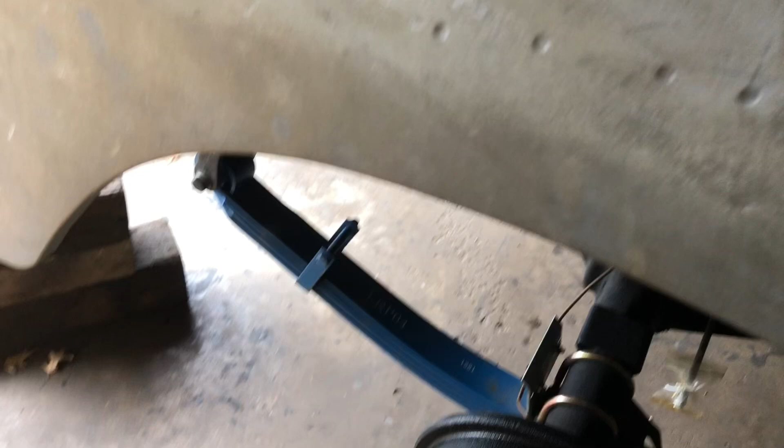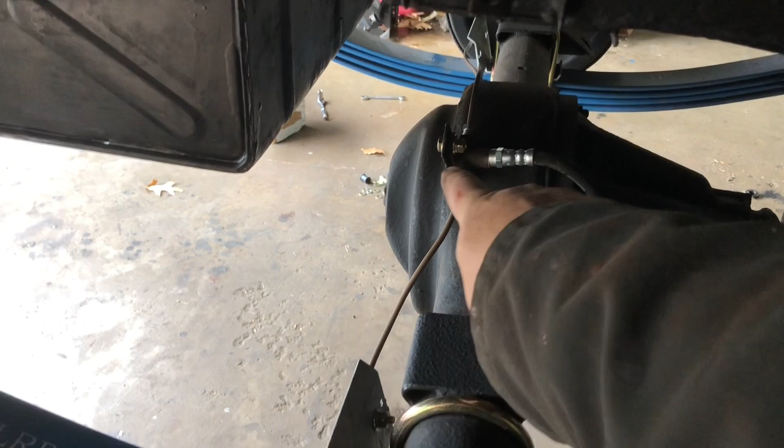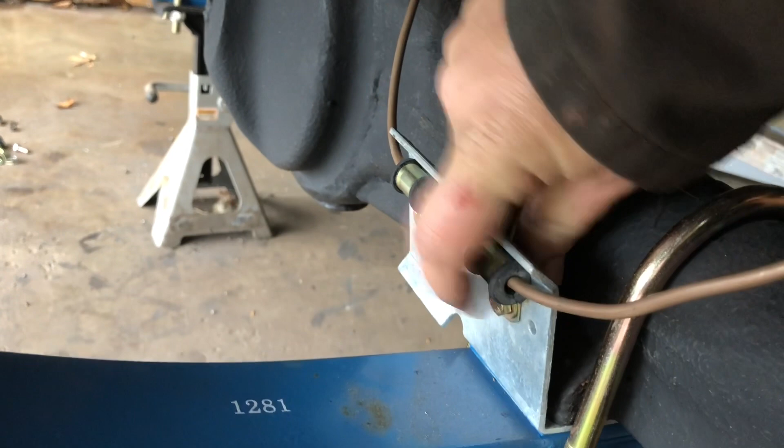Hello and welcome back. So what I'm doing today is I put on the rear brake line with a fresh new bolt in there, and I already made these brake lines before because I had the brakes working before I took it all apart. So today I'm putting these brackets on with new bolts here onto this mount.

So let me show you on the other side. Here's the finished product, so I'll show you on the other side how to put it together.

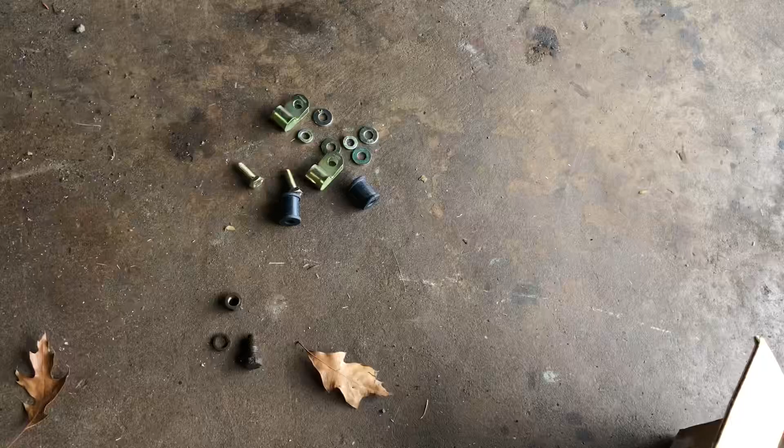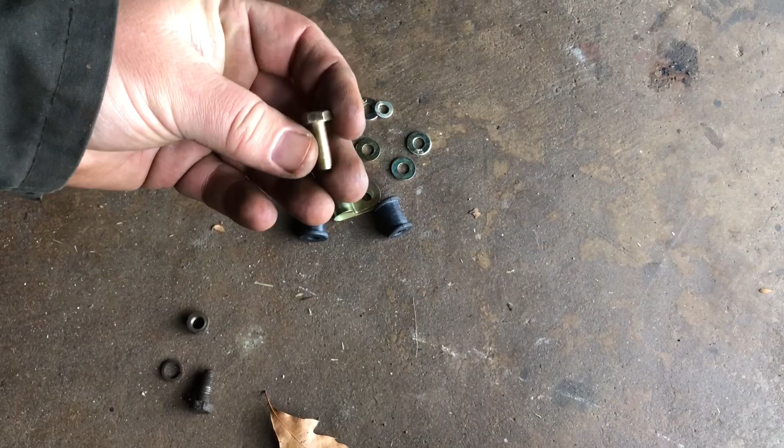Alright, so here are the pieces and parts. Got a little bracket, little bushing, and bolts, nuts. I used 1/4-28 bolts, fine thread, I think they're 3/4 inch long to put them on.

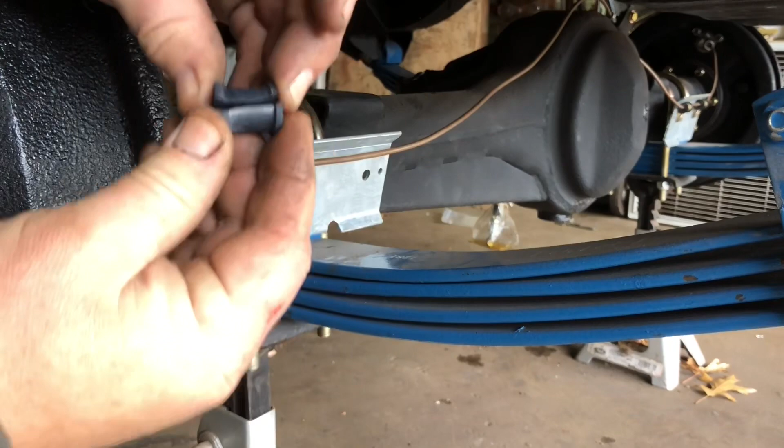So these bushings here, let me show you. These are actually split down here, so you could take it, put them on, put one on the other side.

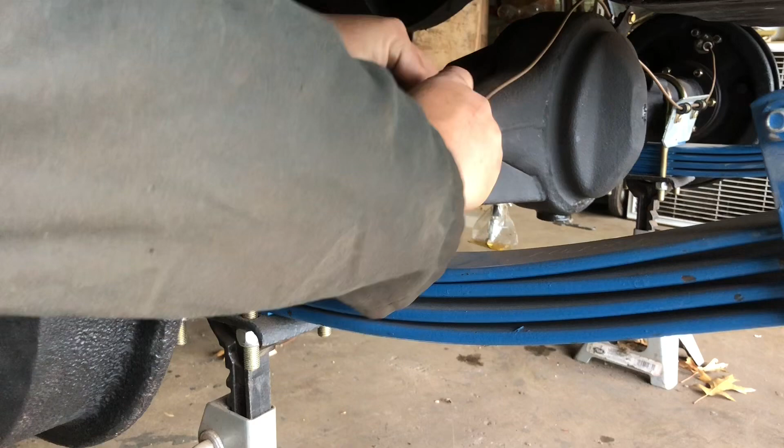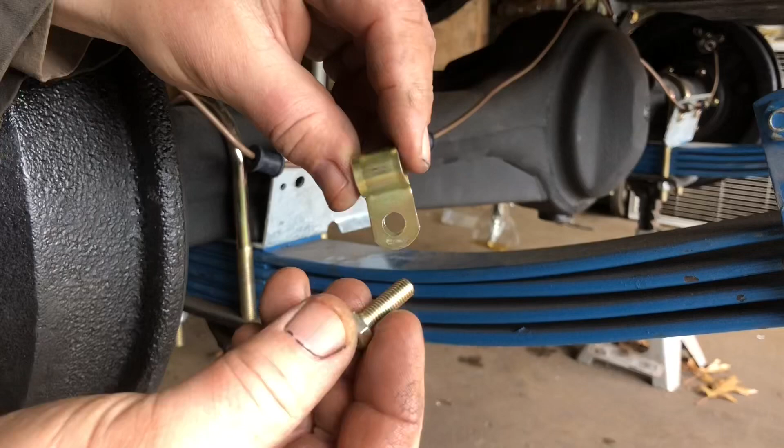There you go. Then these things being BritPart, and you know BritParts are. So this hole was actually, I don't know, maybe a number 8 bolt or screw that goes through, so it wasn't big enough for the 1/4 inch bolt to go through. So I just used my step drill and drilled them right through so then I could put my 1/4 inch bolt there. So you just take these, spread them open.

Put over top of the bushing, like that. This one goes over on the other side. And what it does, it just sandwiches it together like that. Put a bolt, washer through this side, put it together.

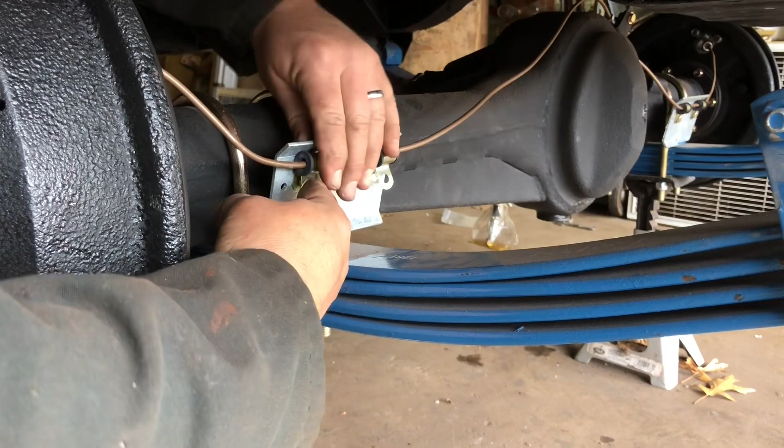There you go. Kind of lines up a little bit. Then you just use one of the holes in this bracket to line it all up. Okay, so you get the gist of that.

So that's what I'm going to do there. And whenever I bought this truck, this plate, which I got from YRM out of all my other replacement panels, the truck didn't even have these plates here, so the brake line actually just went along here and went over. So I think, or maybe it was on the inside, it wasn't even towards the back of it.

So this plate here is the check strap that goes down underneath. It's a safety thing so it doesn't hit your check strap for your axle, so it doesn't go down too far, doesn't get hung up on it or break the brake lines. Alrighty, I'm gonna bolt this up.

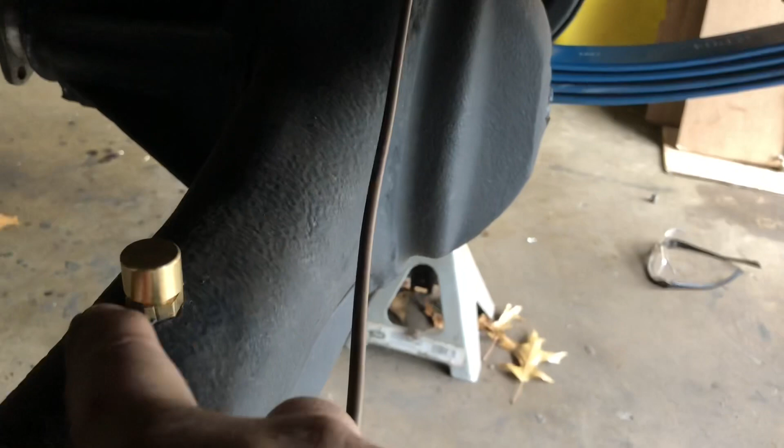I'll be back. Alright, here we are. They're now mounted up, the brake lines. And as I was here, I noticed I forgot to install the axle breather, so I put the axle breather on.

So the next thing I'm gonna do is hook up the brake line, the rubber brake line, from there to there. Alrighty.

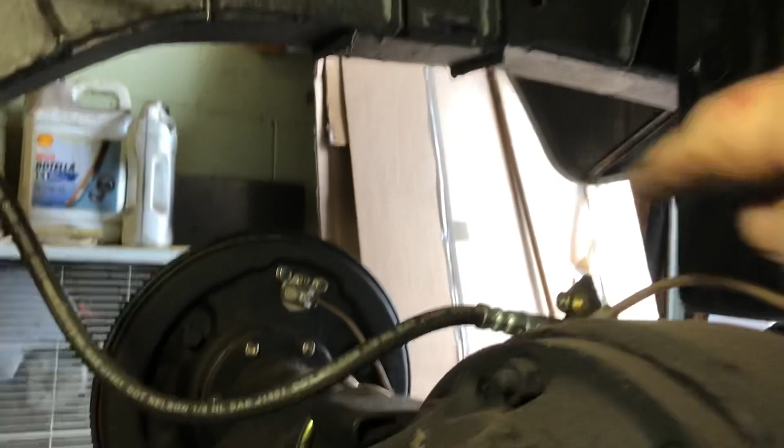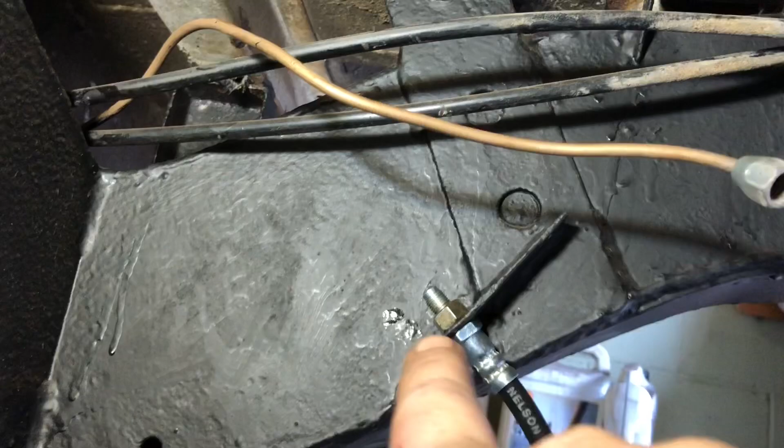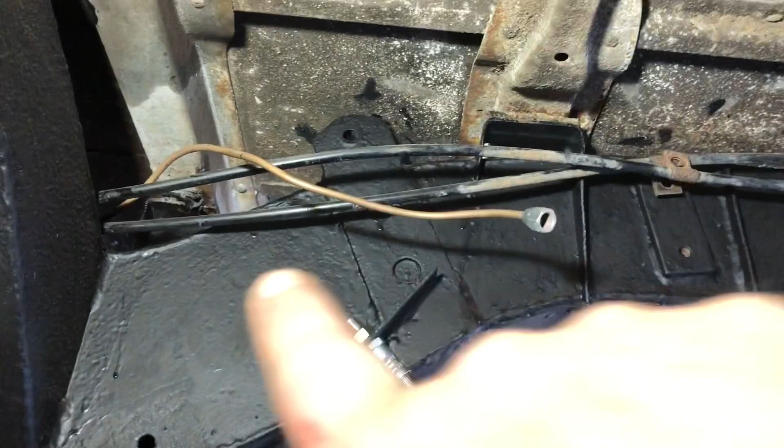Alright, so here we are down underneath the truck. So here's the brake, the rubber brake line, it comes over, it goes up to this bracket, and then this pipe, I think I made it too long, so I'm going to cut it off and make it flow a little bit nicer. I made it way too long while I was out in my driveway working on it. So now I'm in the garage, I can kind of clean that up and make it a little nicer.

So one question I get a lot, or I don't get a lot, but with parabolic springs, people always ask the question, do I need to replace my stock rubber lines? So far, it has a lot of slack to it, and the truck's sitting on stands, so it's holding its weight right now, and it has some slack in there, some pretty good slack to move around.

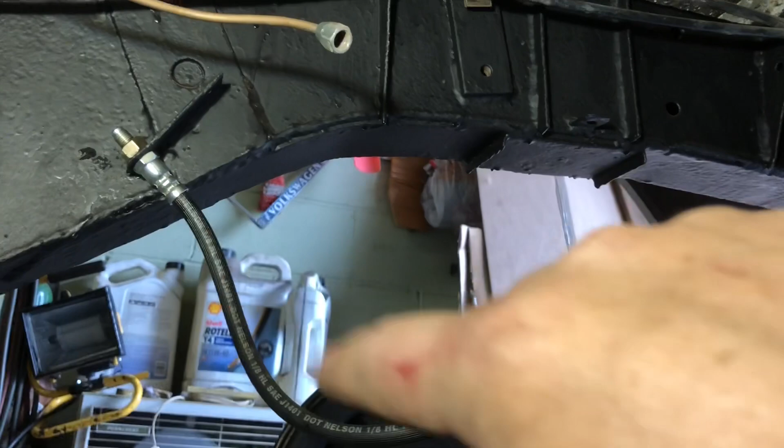So my next test to see if this is going to be a problem with the springs is I'm going to actually jack up the back of the truck, and I have some other work I have to do too while I jack up the back. So that'll be the next test. The first test already, it looks good, I don't see any problems with it as it is. So let's see what happens.

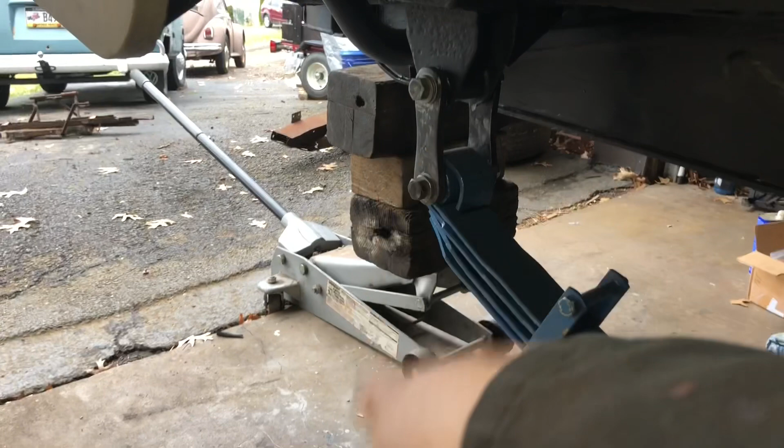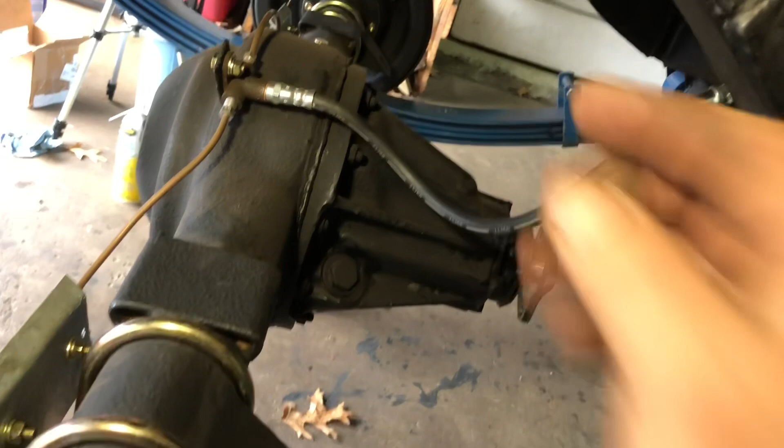Alrighty, so I got the back of the truck jacked up, and the hangers are just hanging straight down. It's just hanging on its own now, the axle by the springs. And you can see here, still lots of slack in there. So I don't know why people say that or whatever, but it looks like it should work just fine, but I'll keep an eye on it while I'm actually driving.

All right, so that's good, brake line's good. So back here, the bolts, they're the ones I bought from Paddock Spares, and not saying anything about them or whatever.

But the bolts have a longer shank, and then the threads on the end. So what I did is I put washers up here. Some lock washers weren't really that great, so I actually bought some 9/16 washers to put on this side for spacers. I'm going to pull the bolt out, take that washer off, and replace it over there. I'll show you in a minute.

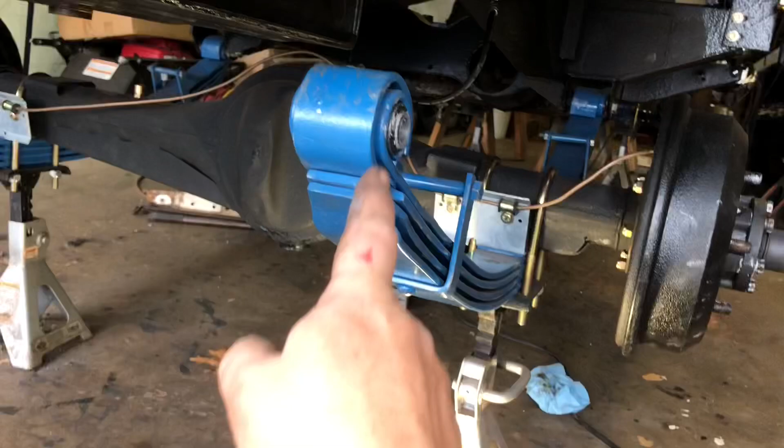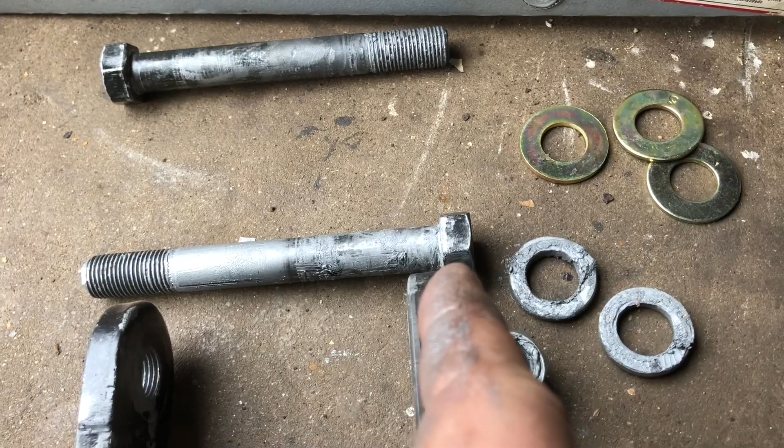All right, so I got the rear shackle off here. You can see I have these spaced the same width as the bushing in there, and the bushing up in the body and frame as well, so they're about the same position. If you take the bolt head and put it flat up against this one, you can see it starts bottoming out because this is threaded on this side.

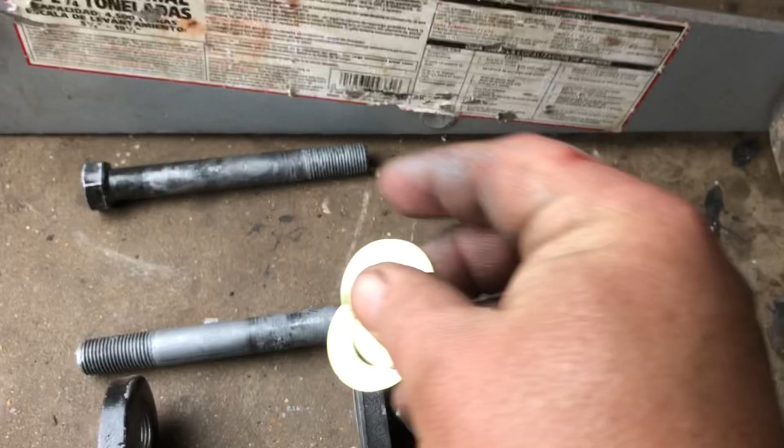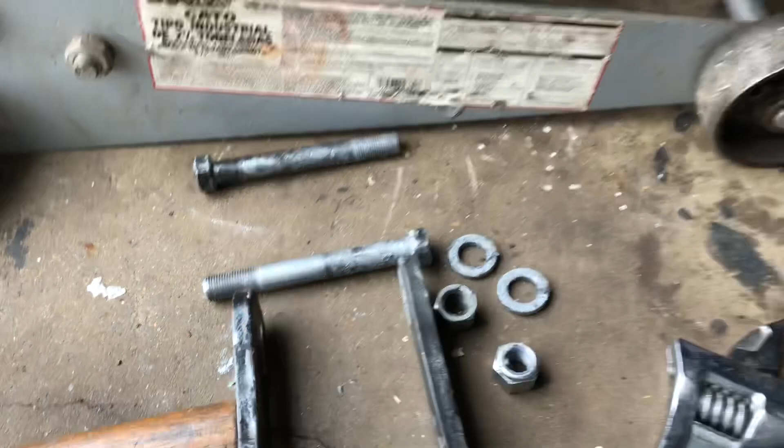So it starts bottoming out and I can't quite get it totally tight. I had these washers in there, and they were spring washers and lock washers - they're not all that great. So I'm thinking if I put 3 or 4 of these spacers in there, it should give me enough spacing so I can get threads to tighten this down the whole way, to pinch the bushing here and pinch the bushing here.

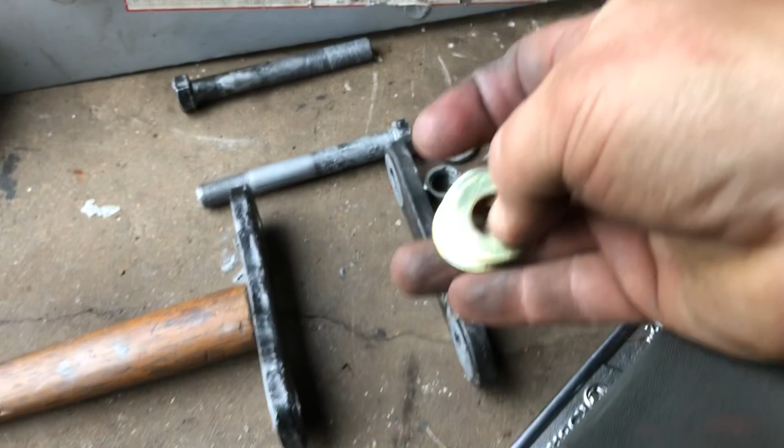Okay, so I'm going to try out some washers. I don't know if I'll do 3 or 4, but we shall see. All right, bye-bye. All right, so I did a test fit with 4 washers. Looks like 4 washers get you nice and tight in there and snug, so it should be good with 4.

Okay, so I got the shackles back in, the top and the bottom one. I put 4 washers, like I said, on there, then went on to the other side. I got the other side done, so I'm happy with that.

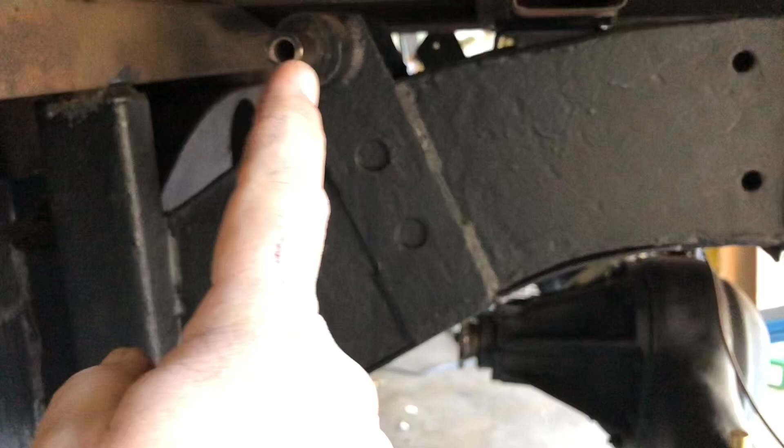So the next thing is I'm going to move on to shocks. I bought some Bearmach shocks here. Those go in right there to up there. All right, I'm going to put those in next.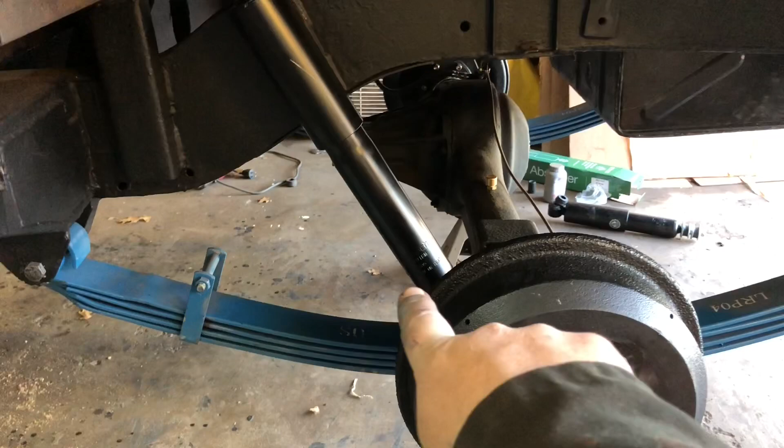All right, so I put the Bearmach shock on, and it's resting right now on jack stands at normal height, and the shock is actually maxed out. It's at its max length, so there's actually no movement in the shock right now in the axle, because I jacked up the back end and watched the shock and it didn't even move. I took the other side off to see, and it's maxed out.

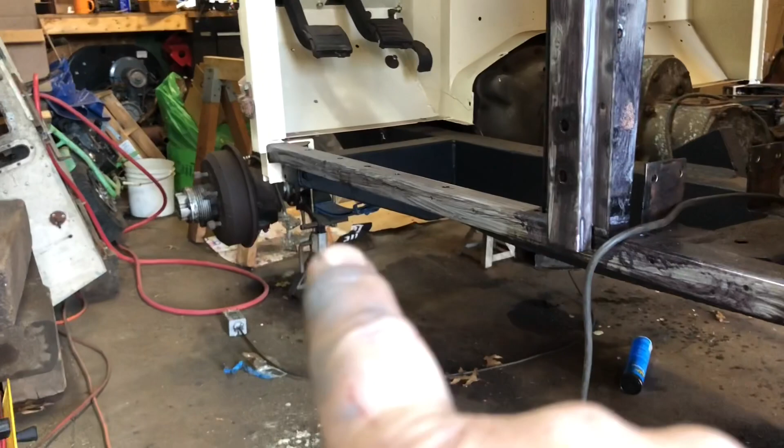It's completely maxed. So these shocks, part number 1401 BM or whatever, are way too short to be used with parabolic springs, at least with the 4 leaves, because it's up pretty high. I think it raised the back end probably about 1.5 to 2 inches, the whole truck itself, along with the front too. So I got Bearmach ones for the front too. When I do the front, I have to test and see what fits up there too.

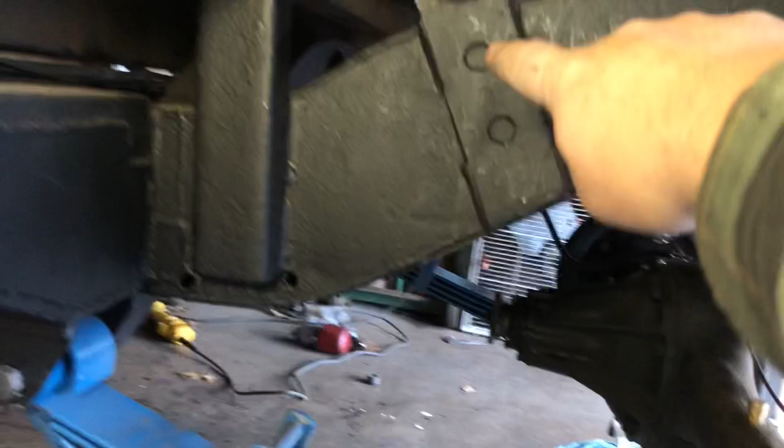So I'm going to take some measurements here and see if I could find a different shock for the rear. I got the shock off on both sides, and I measured from the center of this to the flat right here, from there to the center, and then I figure I'm going to buy new ones for back here. I might as well make sure I have the right ones for the front as well, so I measured those too.

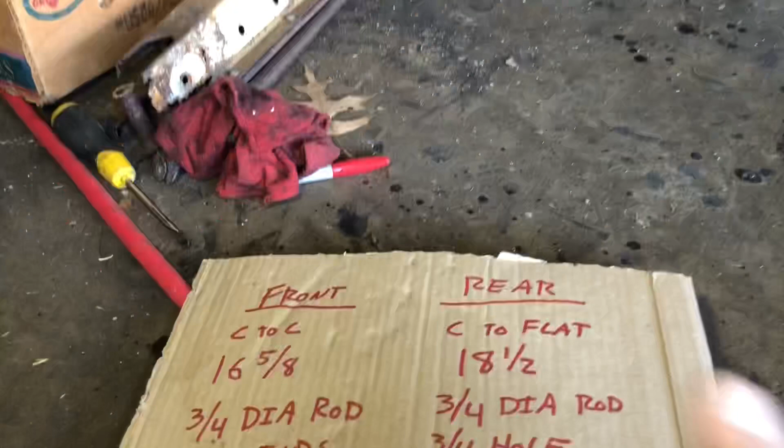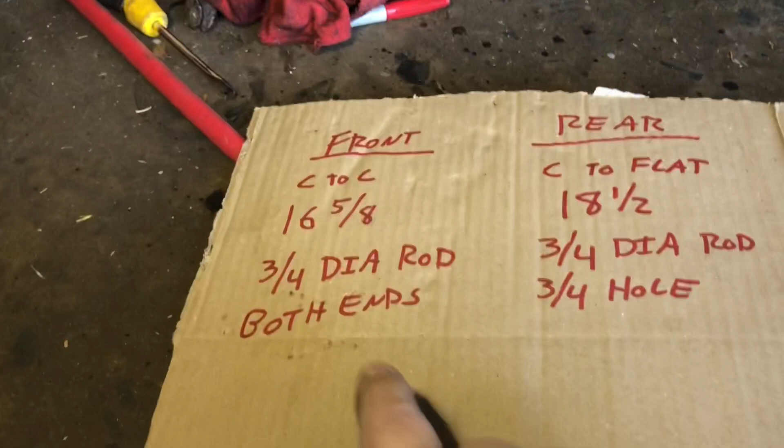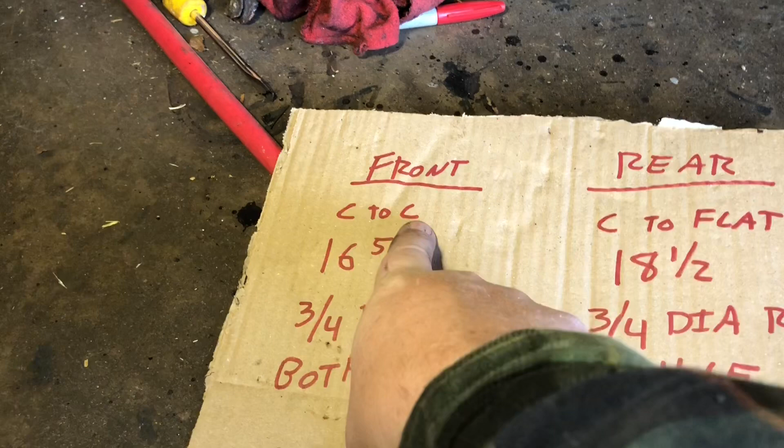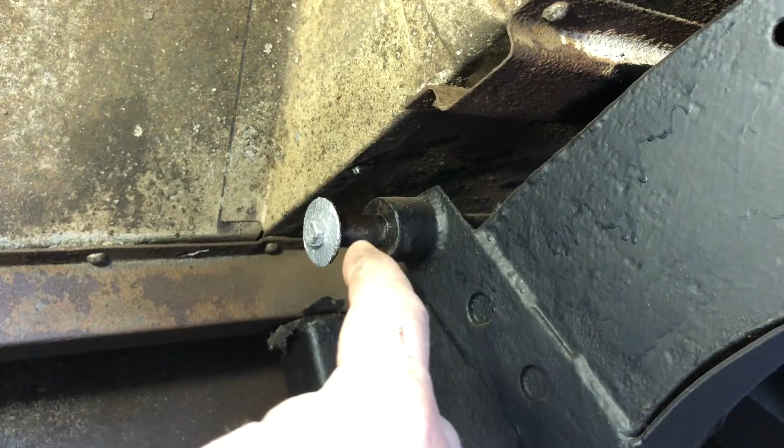So front shocks, center to center, as it's resting statically just on there - everything's just sitting on the springs right now with the jack stands. The front is 16 5/8 from center to center of the eyelets. There's actually eyelets on the top and the bottom of the front shocks, and they fit on a 3/4 inch diameter rod on both ends. So where the bushing sits right here is 3/4 inch, same for the top and the bottom on the front ones.

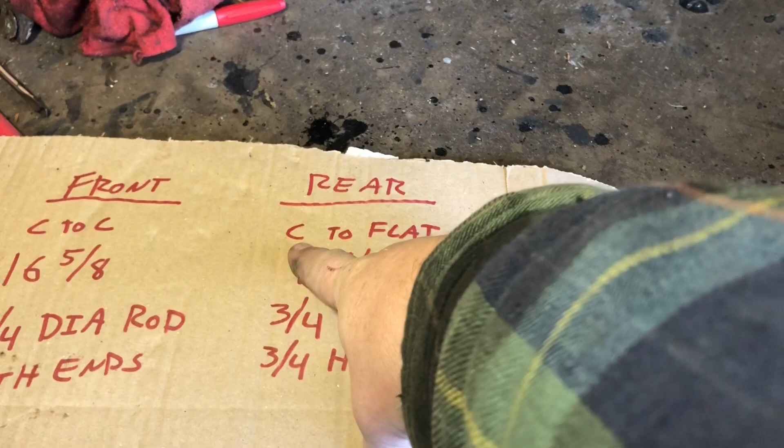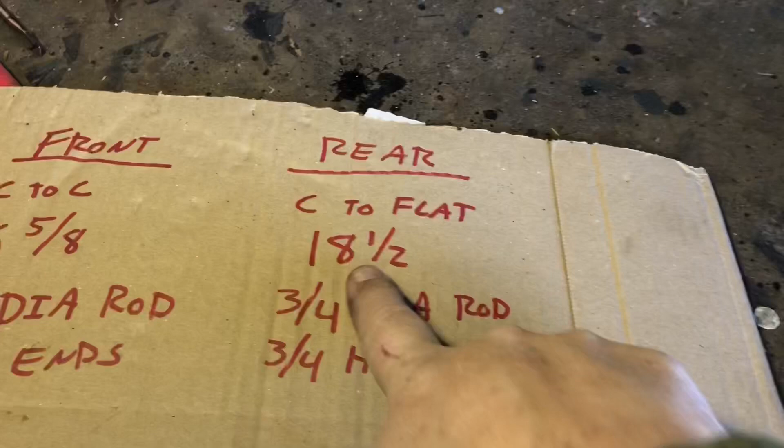So that's there. The rear, I went from the center of that rod to the flat part, right here, from there up to the center of that, and we're at 18.5 inches. Again, it's sitting on a 3/4 inch rod with a 3/4 hole. So I've been searching on the internet so far, and I found some Monroe shocks that would work on the front.

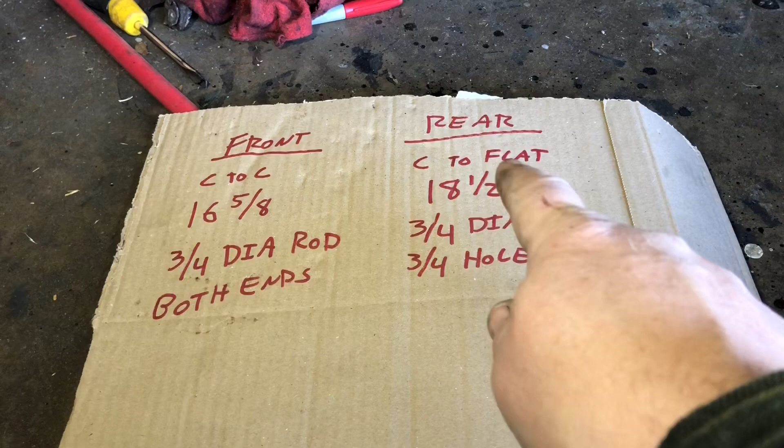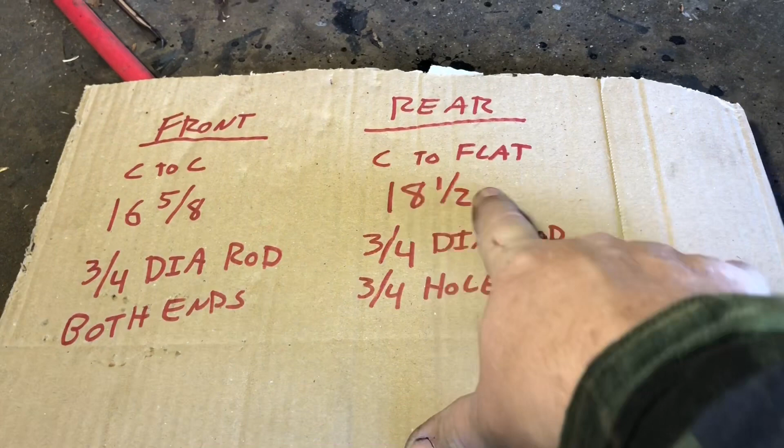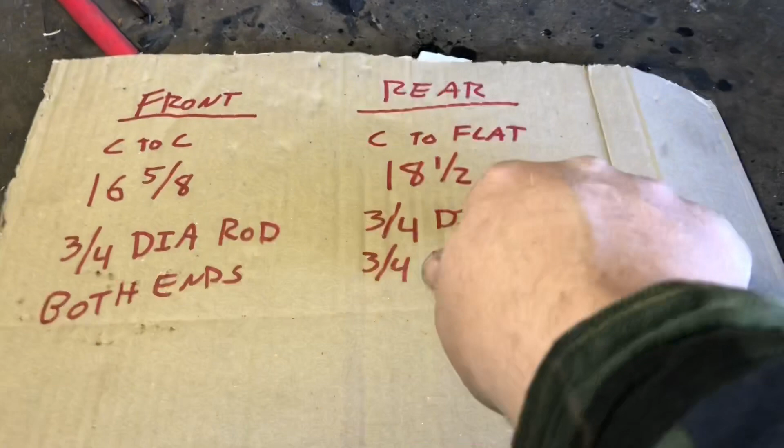But I can't find a shock that fits on the back because they all seem to have center to center, round bushings on both ends. But to have the round bushing on the top, and then a rod stud for mounting into a hole, is the hard part to find so far. So I emailed a company and asked them if they have these type of shocks for this or that. I sent them both, so we'll see if we get a reply back.

Okay, so the shock dilemma is going to take a little bit longer, so I'm going to put the bump stops on now, and I might do the back ones and the front ones all together and get all 4 of them done in one shot.

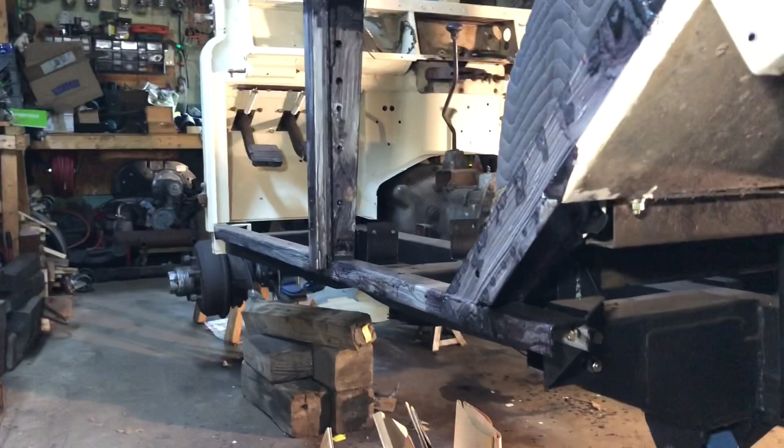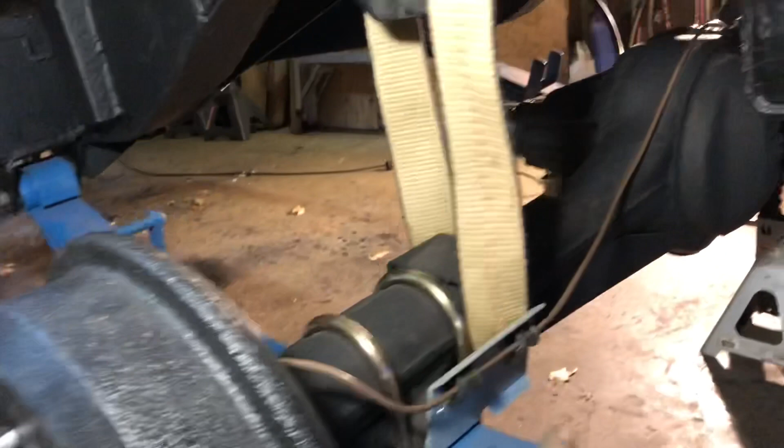Alright, so we're back, and I put the bump stops on all 4 corners, back and front as well. So while I was back here, I didn't film this, but I made check straps for the rear axle, and that explains why this plate's here as well for the brake line. See, it holds it and keeps it away from the check strap.

So I ordered the correct, in quotes, check strap. So I put it on, and it's too short because of these springs, since it raised it up.

So years ago, I found a come along in the middle of the road on my way home from out, just going for a drive in one of the old cars, and I was like, hey wait a second, there's a ratchet strap in the middle of the road. So I went back and picked it up, and that was maybe a couple years ago. So I hacked off pieces of that, and that's what I used for the check strap.

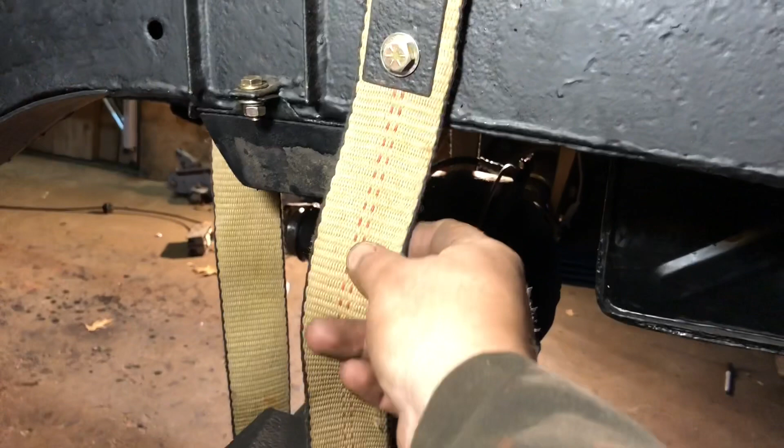And I think it gives it a good look, especially with that red line in the middle. Very nice vintage look to it.

So what I did was I bolted the inside one in, and then I draped it around. I jacked up the back end and let the shocks sag all the way down. Then I pulled it real tight up here until it was above this point, and then I marked it with a marker, took it off, and lowered it back onto the jack stands.

And then I cut it off. This stuff's actually really, really thick. When you go to cut this kind of material, it's double layered, triple layered, and all interwound in itself. Like a razor blade won't even go through this.

So I had to use a Dremel, and as I went through I went slowly with the Dremel, and it actually melted the end as I was doing it, so it wouldn't fray on the end.

So since I let it be a little bit longer on top, I placed this on here, marked it with 2 Sharpies, a line and a dot, and took the Dremel and cut an X in there, right here.

Then I bolted it up, and jacked it up again. But since I actually moved this up a little bit more than what it actually was when I pulled it snug, it rests down and pulls on it, and it does an excellent job.

So I made one for this side. If you could see through the light, I made one for the other side as well. So instead of buying a check strap, you can always make your own check strap, which I think turned out pretty nice. I'm pretty happy with that. So check straps in, there's all the other stuff.

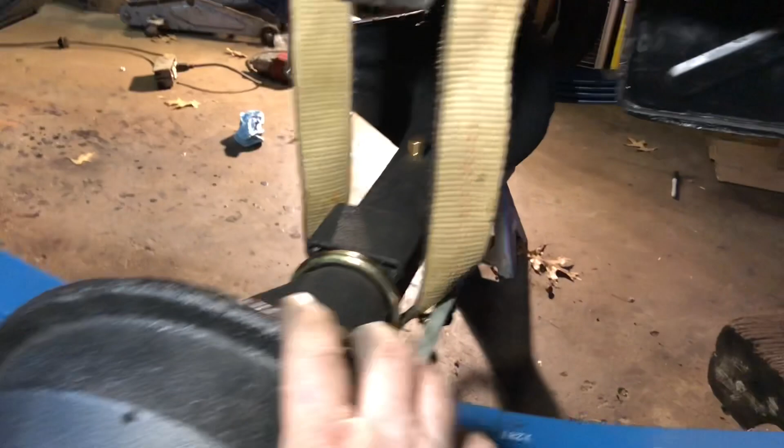This video had tons of stuff in it, so this will be the end of the video. Thank you very much for watching. Hopefully you learned a couple tips and tricks, and in a future video we'll talk about the shocks some more, hopefully I'll get an answer on that.